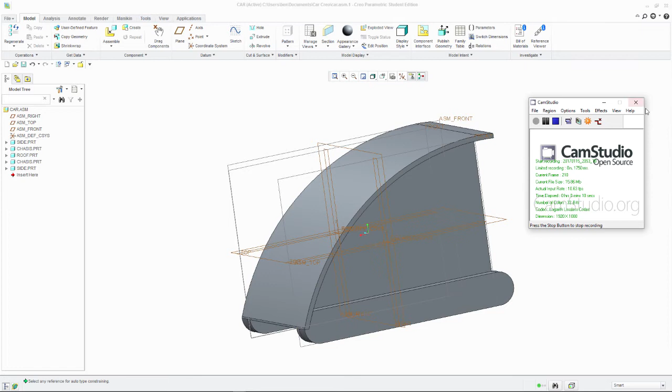So I'm going to put some holes in the chassis first of all, and then I'll be able to use those holes to put in some axles and some wheels. So I'm going to click on the chassis and activate it, and I want to put in a line.

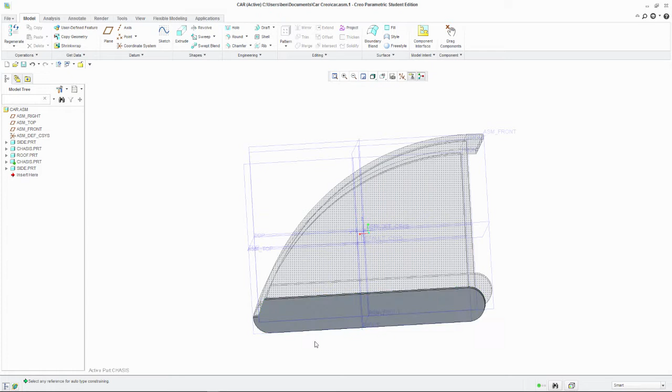I'm going to do an extrude from that face. Okay, I'm going to sketch view, and then I'm going to put in some references. So I want that as a reference and that as a reference. Okay, and that's really all I need.

And then I'm going to put a line across from there to there, and that's just a line for me to be able to draw in the holes for the axles. So I think I should be alright just doing where this curve comes round.

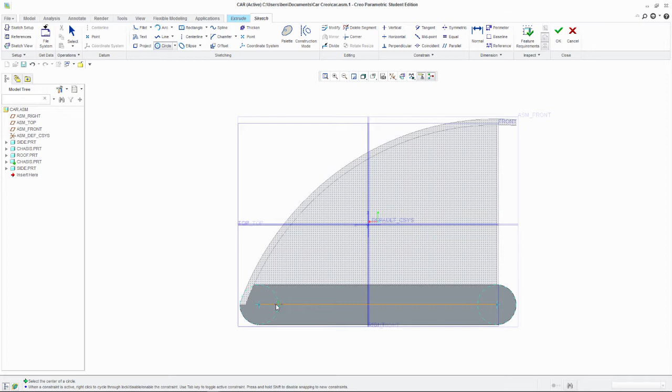I'll just put one in there and one in there, and then if I do it so it clicks to R, that means they're both the same, which they would be, and then I can just change the dimension on one of them and they both stay the same.

So this is radius. I'm going to use 6mm dowel, so I want a slightly bigger hole, so I'm going to do a 7mm hole, so the radius is going to be 3.5.

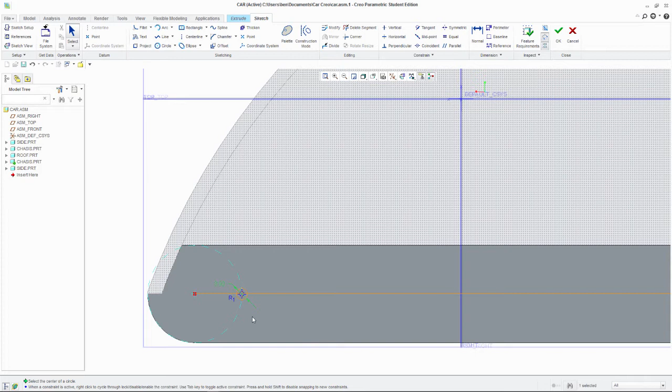Okay, and then I'm going to delete that line and tick, and now that has extruded like that. If I drag it back through, it should cut holes through it, which it has, and you can see that it's done the same on the other side.

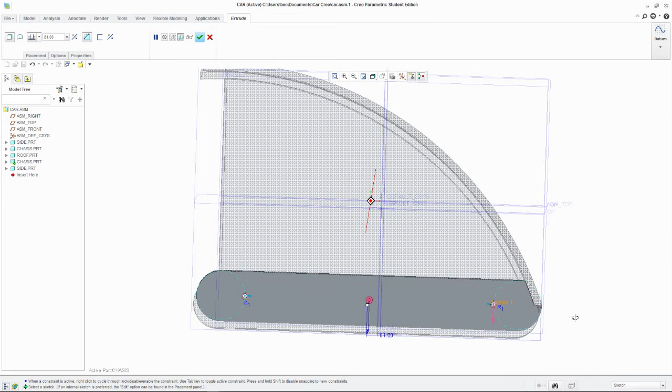Okay, somehow I seem to have managed to have doubled everything, so everything's too big.

These holes look too small, so I'm just going to go back. So I'm going to tick that. Right, so I'm going to just change that. So this is good to show you anyway, because it will just show you if you need to change anything.

So I was working on my chassis. If I click on this drop down and go to that extrude, drop down on that, this is the drawing I did, and I can change that. So if I right click on it and edit definition, I can change the drawing.

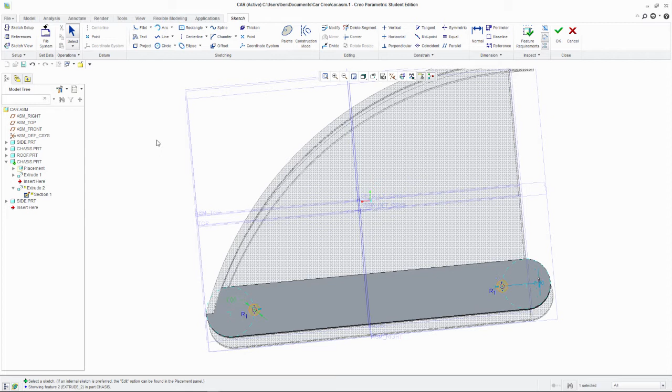So I'm just going to change that dimension to 7. That looks a bit better, more in proportion. Click OK, and then you can see those holes have enlarged.

Okay, and then I'm going to activate. Now I'm going to activate the side part. Okay, and I'm going to just use those holes to draw a hole through. So I'm going to go extrude onto the side face.

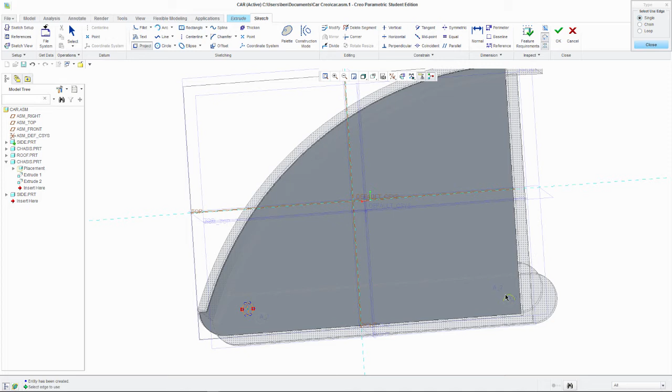I'm going to just simply project these holes, so just choose the top and the bottom, and then tick, and I should now be able to just drag those through, and I've also created holes in the side.

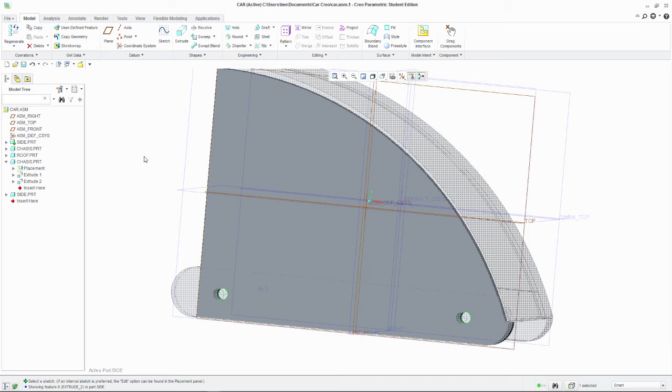Okay, right, now I can, if I click on activate the assembly and create, and I'm going to create an axle, click OK. Create features already there, click OK.

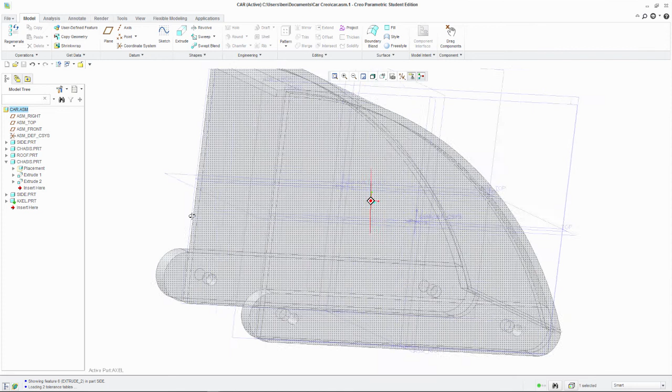So I'm going to do this from extruding from this face. Okay, and I just need, all I need as a reference is that.

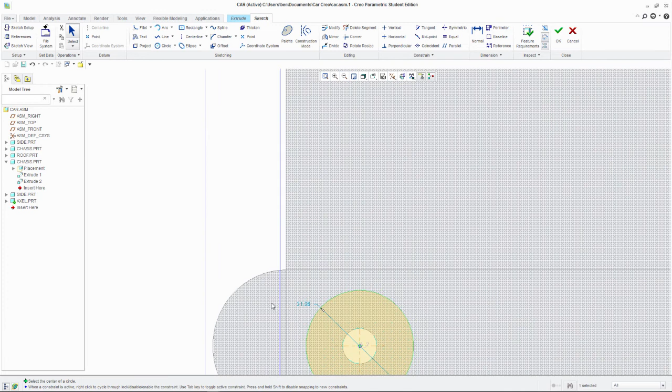Sketch view, and I can just draw a circle into there, do it a bit bigger so I can make it smaller. Click on that, I'm going to make that 6, and you can see it just allows a little bit of clearance so the axle will turn in that hole.

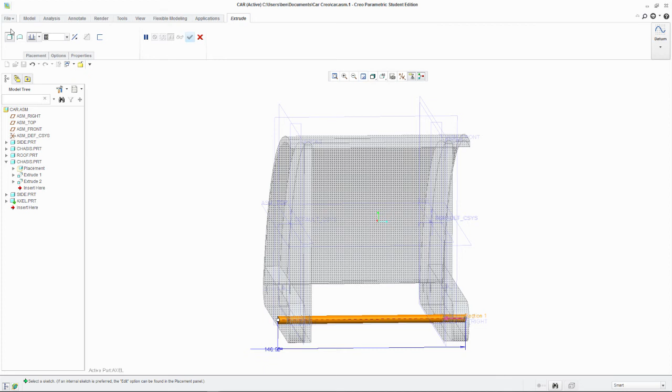Click OK, and I'm going to drag this back this way, and I need it to come out 6mm further than this. So that must be, so it's 140, so I'm going to go 146. Whoops, 146, and tick.

Okay, and then it's, you can see it sticks out on that side but not on that side, so I just need to extend this out a bit. So I just extrude onto the end of there.

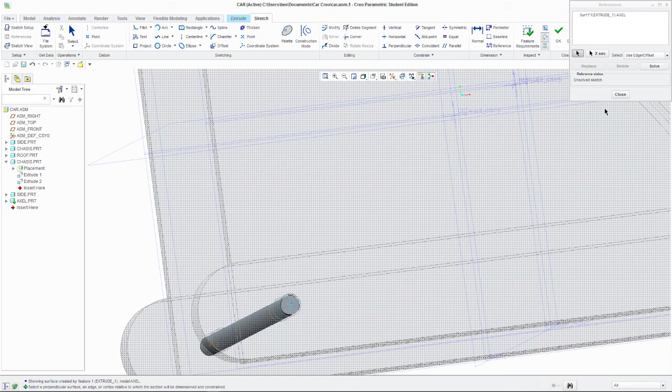Reference is just that outer edge of that, and then I can just draw a circle to that and tick and just extrude that 6mm that way and enter. Okay, so now I've got that axle in there now.